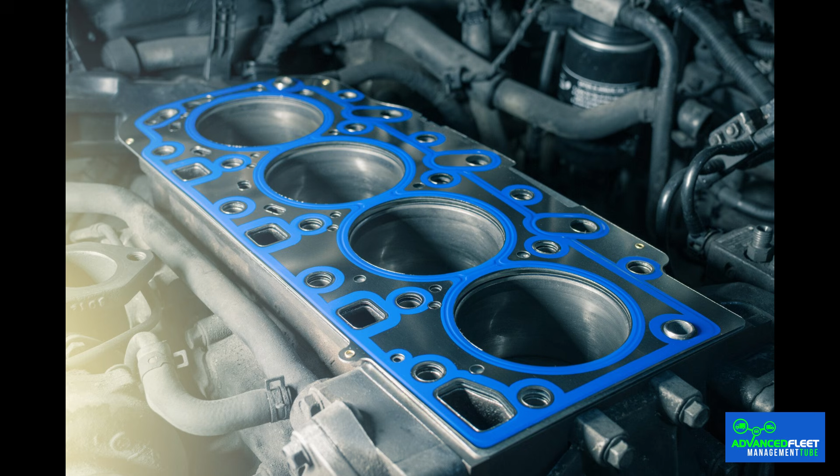The head gasket. There are many elements inside an engine that play a vital role, such as the head gasket. Although it is invisible to the naked eye due to its location, its function is crucial to the proper functioning of an internal combustion engine. The quality of the engine's performance depends on the condition of the gasket, which is responsible for keeping the engine block and cylinder head isolated to prevent fluids from altering the combustion process.

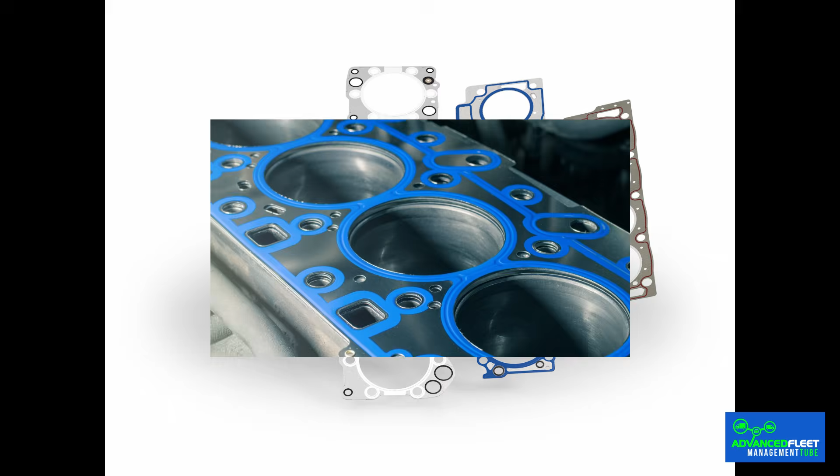It is a sheet that acts as a seal between the cylinder head, the upper part of the engine, and the engine block, where the cylinders are located. Its functions are: seal the combustion chamber, which maintains compression pressure for the engine to run; prevent mixing, which prevents oil and coolant from mixing or leaking into the cylinders; allow fluids to pass through, which allows coolant and oil to pass through to lubricate and cool the engine.

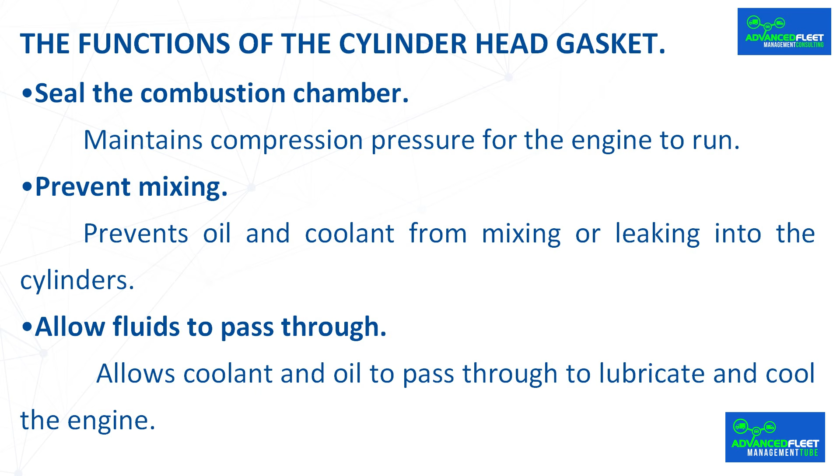Types of cylinder head gaskets. There are several types of gaskets on the market, manufactured with the flexibility required for the function they must perform. The variety is mainly due to the materials used in their manufacture, which must be highly resistant to high engine temperatures. There are one-piece metal-coated gaskets. Most are manufactured according to the manufacturer's specifications. In terms of measurements, you just have to choose the best quality one. Assessing the characteristics of each variant is vital to understanding its durability and resistance to extreme temperature and pressure conditions.

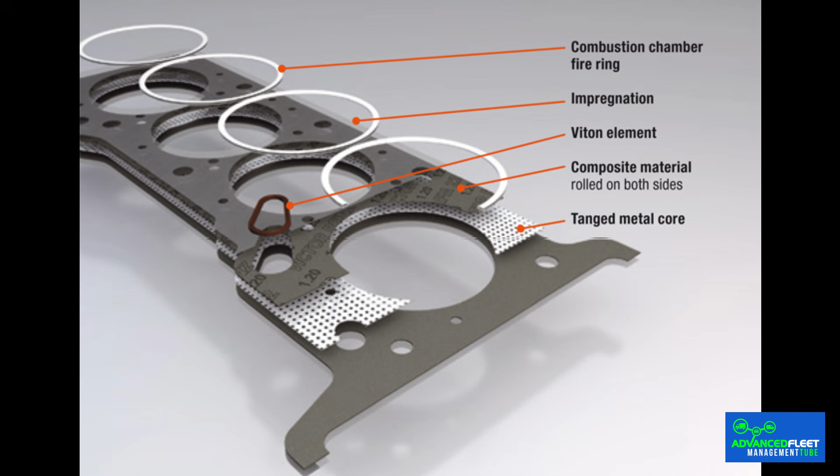Causes of a broken cylinder head gasket. Over time, it is natural for the gasket to lose its original configuration, deteriorate, and become unusable. It can be damaged by excessive overheating, which reduces the quality of the gasket, by a defective or inappropriate cooling system, by a lack of coolant in the system, or because the cylinder head was not properly adjusted in the right place with the correct pressure.

The cylinder head gasket is an important element for protecting the engine and its performance. Therefore, it is very important to be able to identify any failure caused by a gasket in poor condition at an early stage. What happens if the cylinder head gasket is damaged? If the gasket is no longer working, it must be replaced with a new one. In this extreme case, the car has lost power and the compression generated by the engine is no longer sufficient to move. The engine cannot function properly, so the cylinder head gasket must be replaced.

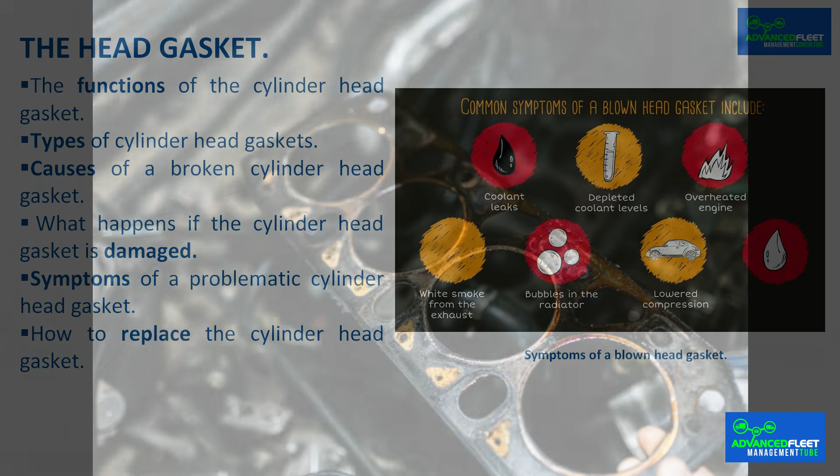Symptoms of a problematic cylinder head gasket. Certain signs and behaviors of the vehicle will provide clues about the condition of the gasket. It is essential to pay attention to these signs, as they warn us of what may happen if we do not take action in a timely manner. If the coolant level is low, there may be a leak in the gasket. Engine overheating. This problem is related to the previous one. If there is a lack of coolant, the engine will overheat because it is not cooling properly, which will eventually lead to serious engine damage.

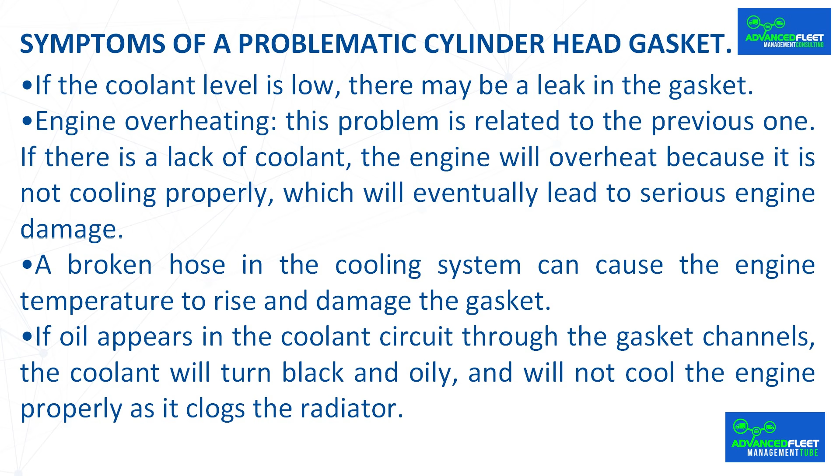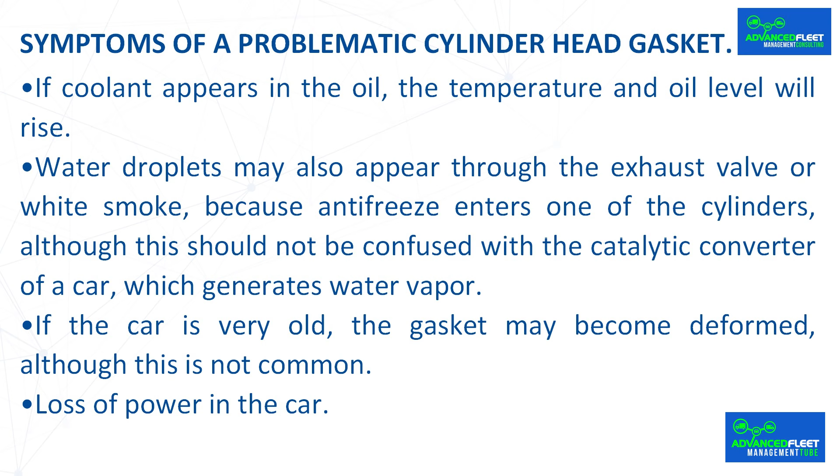A broken hose in the cooling system can cause the engine temperature to rise and damage the gasket. If oil appears in the coolant circuit through the gasket channels, the coolant will turn black and oily and will not cool the engine properly as it clogs the radiator. If coolant appears in the oil, the temperature and oil level will rise. Water droplets may also appear through the exhaust valve, or white smoke, because antifreeze enters one of the cylinders, although this should not be confused with the catalytic converter of a car, which generates water vapor. If the car is very old, the gasket may become deformed, although this is not common. Loss of power in the car.

How to replace the cylinder head gasket. To perform this task, you must carefully follow a few instructions. First, disconnect the battery. Next, drain the oil and coolant from the engine in order to remove the damaged gasket. Before installing the new gasket, it is important to clean the surface of the cylinder head to ensure a good seal. Finally, replace all the parts that were disconnected by reversing the process. Then fill the tank with antifreeze and lubricant. Although it may seem like a simple process, it is not, so it is best to take the car to a repair shop and let professional mechanics take care of this type of work.